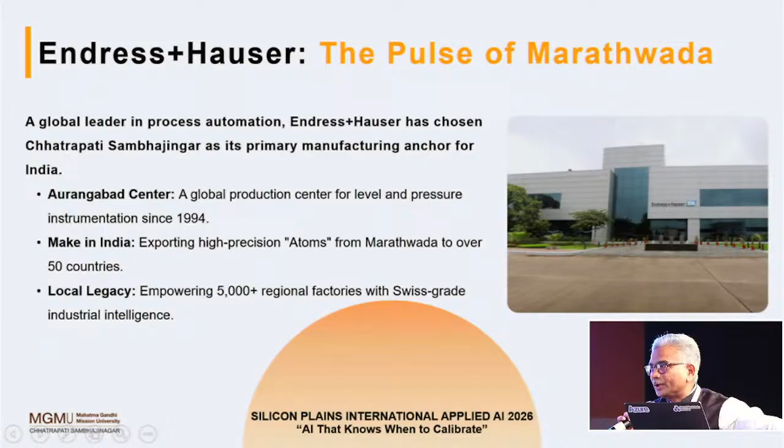Now the topic I selected is the one for which the industry really comes in - automation. When we speak about robotic automation, that's calibration. This is the topic that really resonates, compared to many other equally important topics. So let me first explain the big challenges in the generic industry.

When it comes to industry revolutions, industry has gone through revolutions from 0, 1, 2, 3, 4, and now industry 5 is also coming. What this really brought into the industry is automation again. Initially it was horizontal, then vertical, then supply chain, and now industry 4 really brought in both horizontal and vertical. This automation helps the industry a lot.

Being from the technical side, being technical experts, it's always a challenge for us - how do we improve productivity, how do we bring products out with less time, high productivity, less cost. But quality becomes a very important factor, and it will always remain a challenge, because unless you challenge yourself, you won't excel or your innovation won't come out.

The consistency in quality is always a challenging part. No one can stand still claiming their products are always consistent in quality. The important challenge, I would say, is today the sustainability in the desired quality for the products we manufacture. Okay, so this is very important.

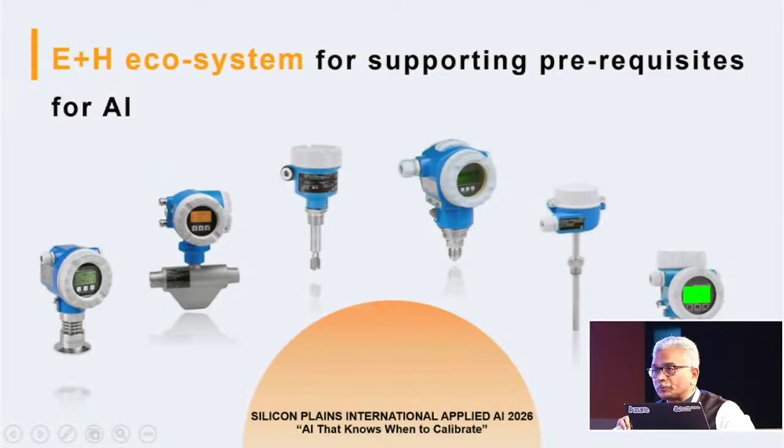available, which can also support calibration details. But the technical gaps - as I mentioned, these three are the major technical gaps we see today. The first, manual logs.

Still today we require people to take their helmets, wear their safety shoes, go to the site, check the sensors, get the condition of the sensors, go with the tools, get the data, bring it in, log it, keep it safe. Then they use it for ISO certification, internal audits, statutory audits, whatever you want. So these manual logs are still there.

Next is detection lags - like current sensors, if they fail, why do they fail? We can predict based on the intelligence of the sensor, but the perspective is still not clear - why do we predict, when do we predict, what are the intervals? There are no standard rules really, although these are defined based on the user, but regulation keeps evolving on how we can bring in detection of these lags in real time.

And the next is data silos. There is still a lot of data, but it's available in different silos. So these are the big technical gaps we see.

Now coming to calibration - as you probably know, but what exactly is meant by calibration? It's a simple process in which the instrument or sensor, which is to be used for a certain purpose, needs to be compared with respect to some standards - international standards or measures you have - to identify the error and how this sensor really performs.

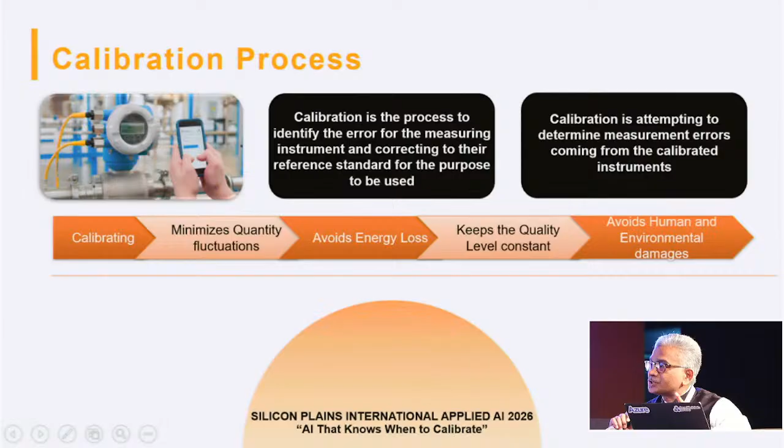And this is what it means - if you have the best calibration, best calibration standards, ultimately it's going to help you achieve the best quality. Now coming to the challenges in calibration - there are two things which can really affect calibration. One, the inherent instrument, what it is being used for.

Second, the process condition, what is this used for. I have a flow meter. This flow meter measures the flow, let's say by using the Coriolis principle, which measures the mass flow, the quantity which is flowing. The Coriolis principle itself defines the forces generated because of the object moving on the rotating body. This brings in some forces, and this is applied in industry to measure the liquid flowing through the flow meter. Based on this principle, you make the flow meters, get them calibrated on the rigs, and then sell them to the people.

These meters are used for 0.05% accuracy. All the petrol stations or gas stations, the meters installed inside are expected to operate at that accuracy, because you pay, and all the transactions are based on that.

Now the calibration can get affected because of two things. One, the physical properties of the instruments being used. The metal I'm using, if it's stainless steel, what is the modulus of elasticity? What are the temperature effects on that particular tube? If there is a change in temperature, there will be physical changes in this instrument, and that can affect the factors used to generate the calibration factor.

Second, the industry process conditions. You are using these flow meters for different liquids. This liquid can erode or corrode the instrument, and that can drift the calibration.

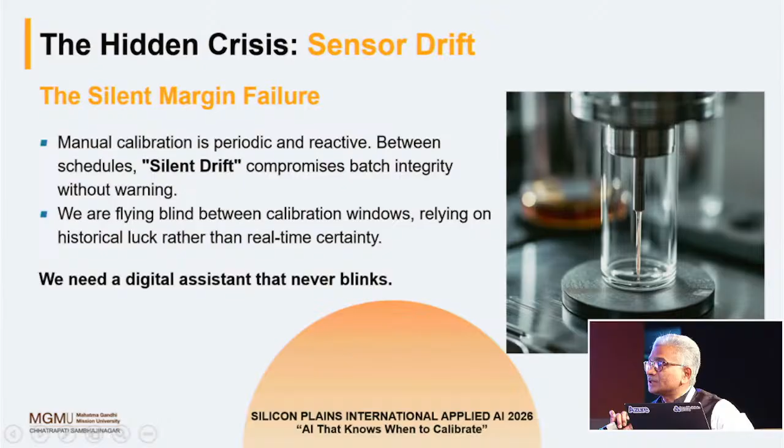And that's the big challenge today, what we call the real-time correction of the calibration factor, rather than waiting for that period and taking the instrument for recalibration against the standard and giving it back. The losses incurred because of this real-time drifting effect is an ongoing and continuous process, and depending on the application, the liquid, the area, the standards, all the SOPs are really defined.

Now, if I want to throw a ballpark figure, a single drift over a couple of months can cost $1.2 million. This is just one of the pharmaceutical examples, but it's a big headache. It's a loss of revenue, it's a loss of quality. Just imagine if this goes into biomedical or pharma, how critical these things are.

So here comes the expertise, here comes the industries, here comes the development guys, but all this data we get is based on our experience. Again, retrospectively we keep working and predicting, okay, this is what it could be.

And if you see, there are regulations, quality standards, regulation standards, especially in the pharma industries. Some examples are API, EI, ISP, FDA, EMA, OIML. Different industries capture these standards. What are these standards made for? They define the standard operating practices for calibration of these instruments.

And where do they get from? All these experts get it from experience itself. Again, I repeat, this comes from experience. But still, the challenge is, how can we really get this in real time?

And that's what I would like to put in front of you guys: that we need a system that detects physical drift in real time before it violates compliance. Your solution must be plug and play, user-friendly, for the legacy hardware of the global titans, turning easy sensors into self-validating nodes. This should be universally accepted, a generic solution that can add big value and solve for this particular industry.

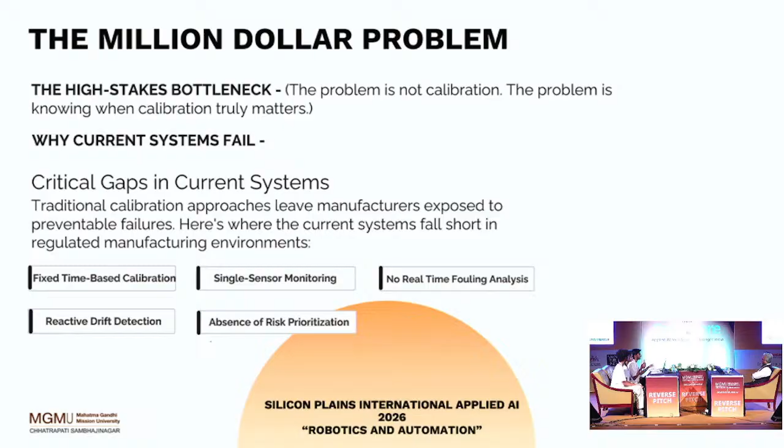Current systems wait for failure rather than predicting. When the failure comes, some systems then take action and calibrate or improve the device. And the last gap is the absence of risk prioritization. Current systems know that certain sensors are not calibrated, but this is not prioritized - like which sensor needs to be immediately calibrated according to their importance level. This needs to be prioritized.

The isolation forest is used for anomaly detection, and fast Fourier transform is used if there is any fouling on the sensor - like material covering the sensor surface - which creates signal degradation. And Bayesian risk modeling, with the help of Bayes' theorem, calculates the risk from 0 to 100.

Instead of giving a value like yes or no for whether you have to calibrate, it will give a scale value, a risk score. So according to it, we can analyze and do the calibration.

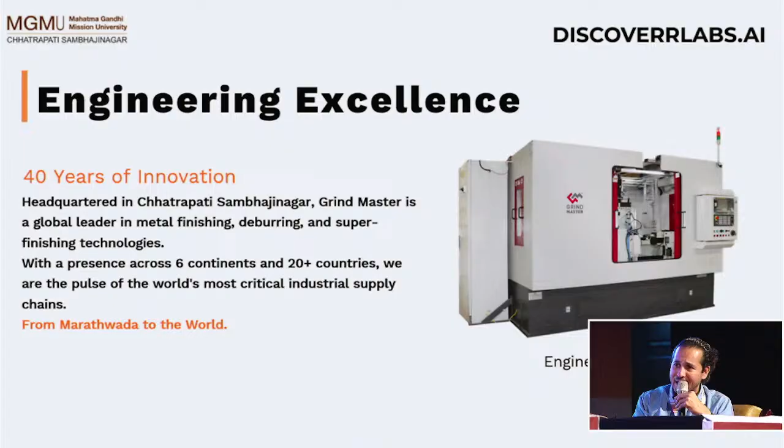So as a company, we believe in Make in India and Make for the World. So any technology which we develop or get into, our objective is always to make the technology of a quality and specialization with which we can export it worldwide.

Machine tool industry in general is a strategic industry. It is the backbone for the manufacturing industry. To make anything of value, you need to have the machines which can make it. You want to make a tank, you need to make an engine of a tank, you need to make the barrel of a tank. To make an aeroplane, you need to make the turbines, you need to make the landing gear. So to make high precision parts and whatever you want to make in manufacturing, you need to have a very strong base of machine tools.

The second key strength that we have at Grind Master is to develop ability with local talent. Most of our engineers are from the Marathwada region, building the local talent to a world-class engineering setup which can meet and exceed global benchmarks and set new benchmarks on various technologies and processes. This is the process technological expertise that we have in finishing, and the high level of engineering and quality which our engineers bring enables us to have this culture of engineering excellence, which enables us to do what we do.

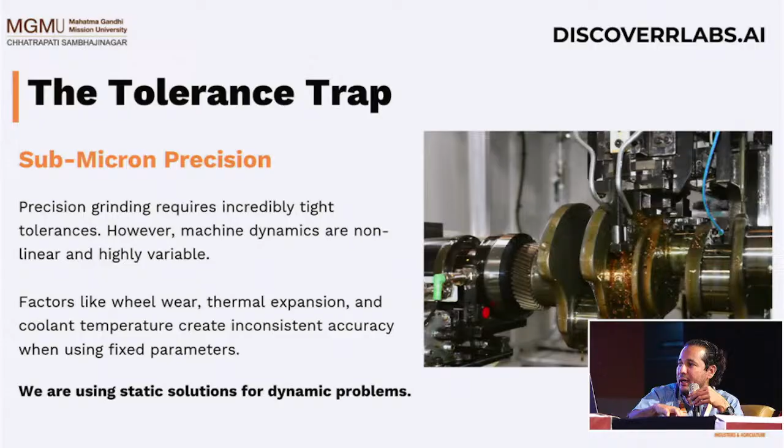So this is the traditional way, and that's why I'm saying that we are using a static solution to solve a dynamic problem. So our solution, whether it is in Europe, Japan, or India, is to use a static solution - a thermally stable material.

Now, the Germans and the Japanese, when they invented this kind of solution, did not have access to AI. They invented these solutions in the 1980s, 90s, and 2000s without access to AI. Now since we have access to AI, if we are developing these solutions, it gives us an opportunity to not just match, but to leapfrog.

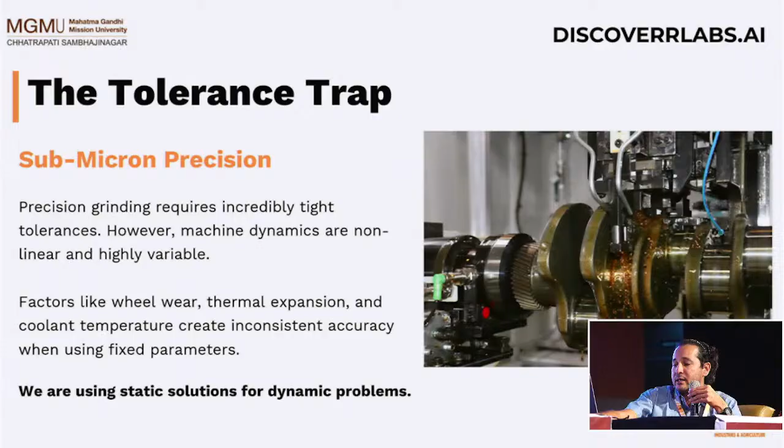What do we do by solving this problem? We generate a higher machine accuracy. Specifically in the field of grinding machines, if we solve this problem, we will be able to produce machines which will make us truly Atmanirbhar. Not only Atmanirbhar, but we will be able to beat exports - beat European companies, beat Japanese companies, and export our machines to these countries.

Which is a key factor of being a Vishwaguru. I would not be able to call ourselves a Vishwaguru if we are importing about 60% of the machinery which we need in the country. So it is essential that we develop it from a technological perspective in order to build the nation and to move the nation into the next decade.

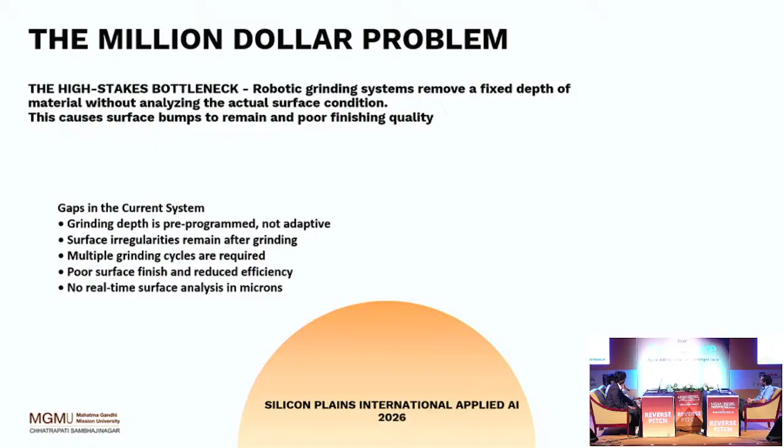In industries where precision is one of the most important things, like aerospace, automobile, and tool manufacturing, these small irregularities create a huge impact on quality. So the main problem of these robots is they don't have the ability to analyze the surface and take decisions accordingly. So for that, our solution is Grind Mind AI.

Mayank will continue from this. As he explained the problem, our solution is our AI-powered robotic grinding machine, which uses an AI system created by us, named Grind Mind AI. The system is integrated with various sensors and AI adaptive processors.

First of all, it scans the surface which we are going to process or finish. It's scanned with laser or optic sensors, which give an accuracy of 94%, highly accurate. Then it provides that data to the AI adaptive software, which analyzes the surface and gives data to the motor controller. The motor controller operates the whole machine and helps the tools or cutter we use for grinding, giving a specific length, depth, and adaptive quality to the surface.

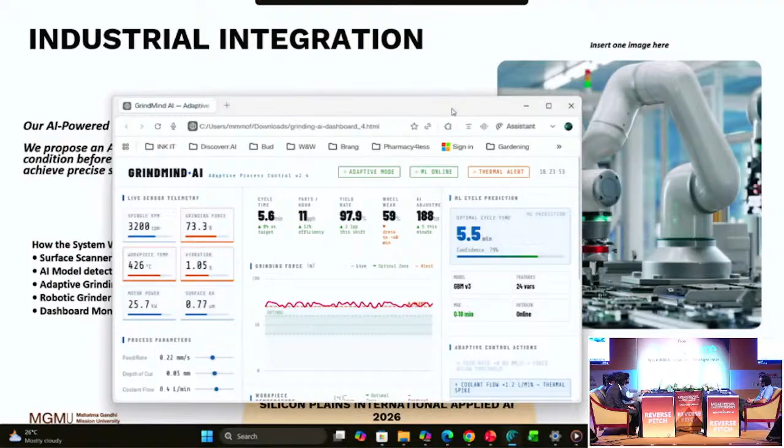Now I will show you our dashboard demo. This is the GrindMind dashboard demo prototype, which is visual right now.

It is divided into 3 sections. First, the left section, live sensor telemetry. These are live readings from the grinding machine, showing the current real-time performance of the machine. It has 6 parameters right now: spindle RPM, which shows the speed of the grinder moving on the workpiece.

Second is force, which is acting on the workpiece from the machine. Third is workpiece temperature - the temperature on the workpiece increases or decreases, which reduces its quality, so the real-time temperature is shown on the dashboard. Fourth, vibration - during the process, the robot shakes, which also reduces the efficiency and quality, so by seeing the vibration, we can stop the machine or improve production.

Then motor power, the electrical power the motor is using, and surface roughness, which shows the smoothness of the surface during the process. The lesser the value, the smoother the surface.

Then we have another 4 parameters, process parameters, which control the main grinding process: feed rate, depth of cut, coolant flow, and speed. The feed rate indicates the workpiece movement during the process. Depth of cut shows us the removed material during the process. Coolant flow tells us how much coolant liquid was required during the process to cool the workpiece. And speed is for the speed of the spindle.

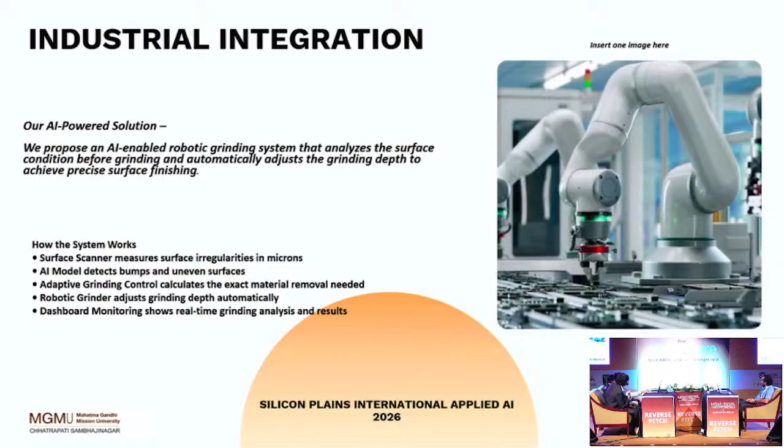In current grinding methods, surface detection depends upon manual inspection, so accuracy is lower. The standard robotic grinding method system has a grinding depth that is pre-programmed, so the robot is cutting material without analyzing bumps.

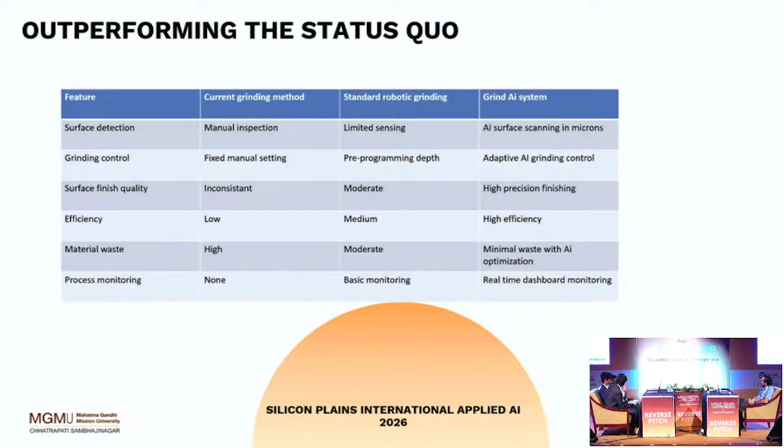Low energy consumption is achieved by using this AI. It also improves production efficiency - the AI-driven grinder provides faster production and high precision manufacturing.

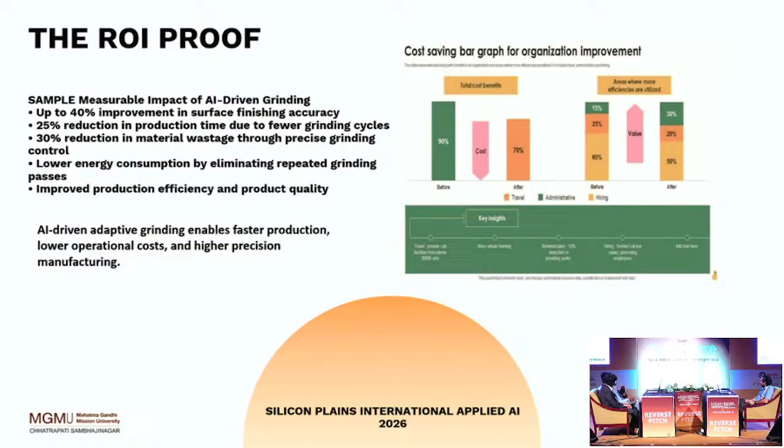So our ask is to transform GrindMind AI from a virtual prototype into a real industrial AI grinding solution. We require real access to a manufacturing environment. As you said, you have rich data of 40 years, which would help our AI model get trained well as the industry needs. We need a real-time manufacturing environment, production data expert, and guidance of industrial mentors to validate a refined adaptive grinding system. Thank you, sir.

The finishing or grinding challenge is not an easy one. I am very happy that this team has come out with a bunch of interesting ideas. Some of them are practical even today. Some of them might become practical in the future with the availability of sensors and other devices needed for implementing those ideas. Going forward, we will be happy to mentor the team and make our workshop and research lab accessible for the development of this kind of technology in the future. Thanks a lot for your inputs, and all the best.